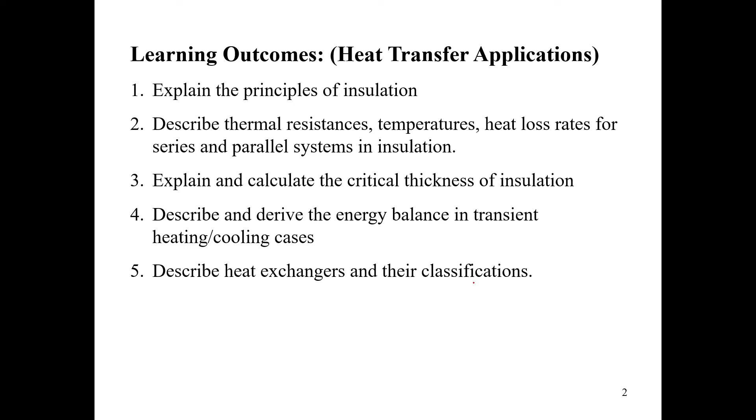We will also look at another application, that is heat transfer in transient heating and cooling systems. And finally, we will look at a third application, that is heat exchangers and their classification. Okay, so let's look at the insulation case.

So heat transfer is an important subject, and actually it's one of the most important subjects that you will learn as a chemical engineer, because heat transfer is everywhere in our daily life but also in industry. So whatever industry you go, you can always find some basic applications of heat transfer.

But another important point about heat transfer is that it is one of the three main conservation phenomena that you deal with as chemical engineers: momentum transfer, mass transfer, and heat transfer. So if you understand the concepts of heat transfer, not only can you understand many processing situations, but you can also understand these other conservation phenomena, because they more or less follow the same basic principles.

So as I said, heat transfer has several applications and they are present everywhere. One of the most common examples is heat exchangers. Any industry that you visit, you can always find some heat exchangers. The second most common application is insulation, because we always want to conserve the heat in the system, so we always try to use insulation so that we don't have heat loss to the environment. Some other examples of heat transfer are heat dissipation and thermal energy storage.

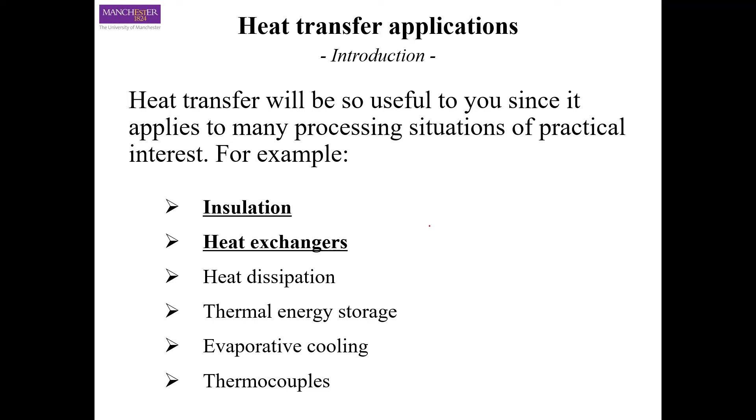So let's look at the application of insulation. Here we are going to look at heat loss through a composite cylinder. The reason we are looking at a cylinder is because a lot of the systems in any process engineering plant can be approximated as cylinders. We have cylindrical vessels, we have all the piping in the process plant that can be approximated as cylinders. So we are going to look at how the heat loss happens through a composite cylinder.

So for example, you have a pipe, and let's say the hot fluid is flowing through it. We want to put layers of insulation around this pipe. As you can see here, let's say this white is one layer, then you have a second layer, and then another material as a third layer. So we want to see how the heat loss happens through these composite layers. For example, we can look at different cylindrical layers in series.

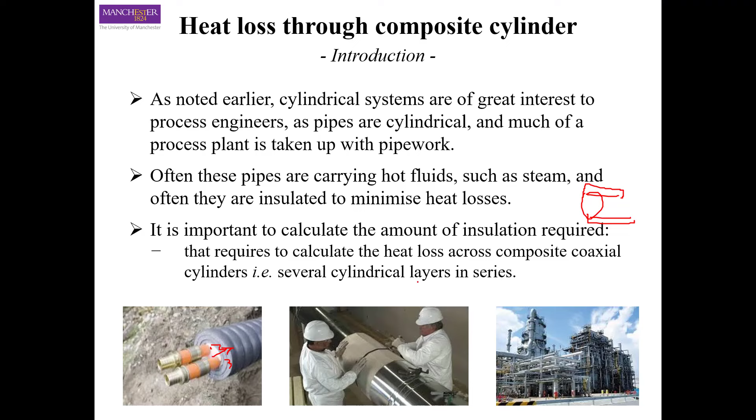The easiest way to do it is to use the concept of thermal resistance and its analogy with Ohm's law from electricity. So let's say you have a process plant with a pipe that is non-insulated, without any insulation, and a fluid moving in the pipe at temperature Ti. Outside the pipe, let's say it's a windy day, so the wind is blowing outside.

So what kind of heat transfer mechanisms are involved here? There are three basic phenomena. First, because the fluid is moving inside the pipe, the motion of the molecules gives some form of heat transfer. So you have convective heat transfer, represented here by Hi, the internal heat transfer coefficient due to convection. Then the heat passes through the solid pipe wall due to conduction.

And then we have the third mechanism happening outside the pipe. As I said, it's a windy day, so the heat is being transferred from the pipe surface to the environment, so we have another form of convection outside the pipe. Now, in order to calculate the net heat transfer, we can use the analogy from electricity, like Ohm's law. The net heat transfer is related to the driving force, delta T, through the resistance.

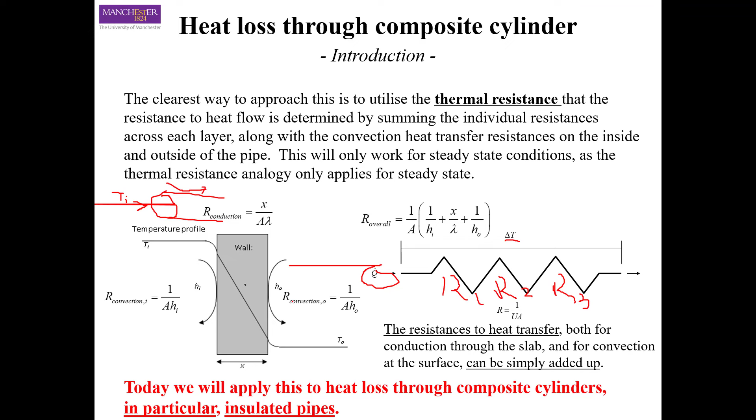So if you sum all these 3 resistances, because they are in series, we get the overall resistance. So to calculate the net heat transfer, we need to calculate the resistance of this composite system, that is, the different layers of the system.

Now let's look at a situation where the pipe is insulated. Again we have some fluid that is moving inside the pipe. So the pipe is here, and then this is the insulation layer, and that is the pipe. Inside the pipe we have a fluid that is moving at a temperature of TA.

So we have the first resistance that is due to convection inside the fluid, and that is represented by RA. Then we have the second resistance due to the wall of the pipe, as we saw in the previous slide as well, due to the conduction resistance, that is R1. And then we have another conduction resistance due to the solid insulation, and that is represented by R2. The pipe wall has a conductivity lambda1, and the insulation layer has a thermal conductivity of lambda2.

At the outside of the wall the heat is being transferred to the environment, and that is due to convection. So we have RB as the second convective resistance. In order for the heat transfer to happen, TA is not equal to TB, and if TA is larger than TB, then the heat is going to be lost from the system, going from the fluid to the environment.

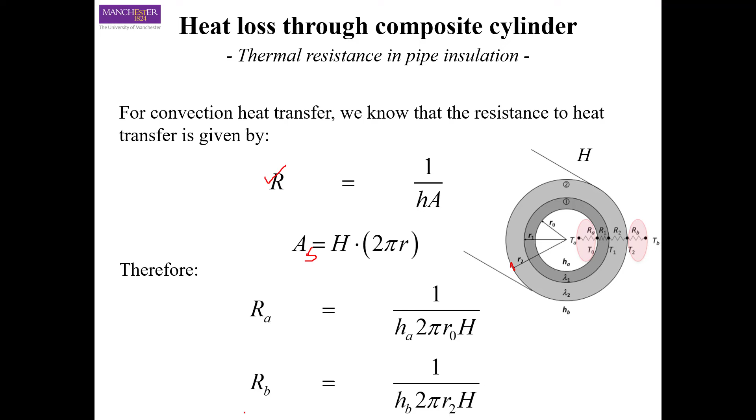Similarly we can write the resistance of the outer fluid, RB, that is 1 over HB times 2 pi r2, the total radius of this pipe to the surface of the insulation, where the outside layer starts, times H, the length of the pipe. So we know the convective resistances of this system. Now let's look at the conductive resistances.

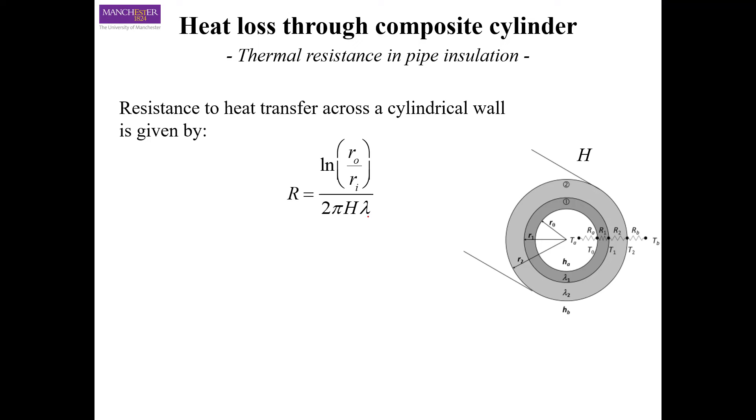From the previous lectures, we know that the conductive resistance of a cylindrical wall can be written as R equals the natural log of the outer radius divided by the inner radius, divided by 2 pi H lambda, where lambda is the thermal conductivity of the wall. Using this generalized equation, we can write R1, the resistance due to the pipe wall, and R2, the resistance due to the insulation wall.

Here we are using the respective radii: for R1 we are using r1 over r naught, while for R2 we are using the outer radius of the insulation divided by the inner radius of the insulation. Lambda 1 is the conductivity of the pipe, and lambda 2 is the conductivity of the insulation.

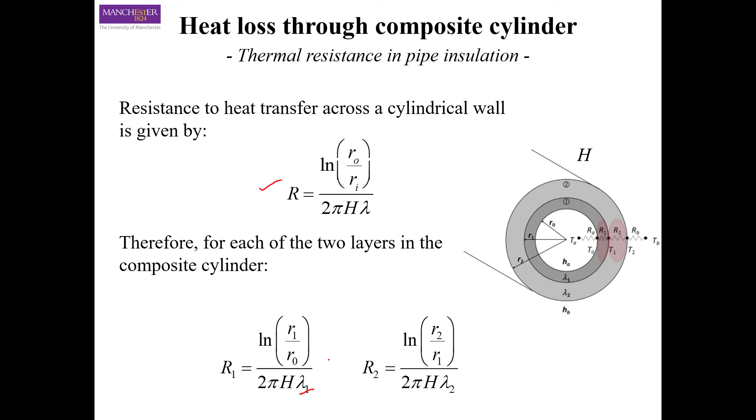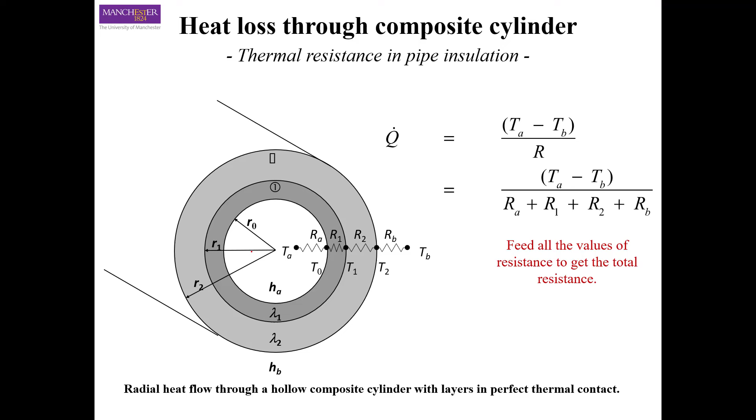So we know all these values of resistances now, so we can use the equation we previously discussed, and if we put all the values of resistances in this equation and get the total resistance, we can calculate the net rate of heat transfer in this system. So this is one way of using these resistances to calculate the net heat transfer through the system. That is all for this part.